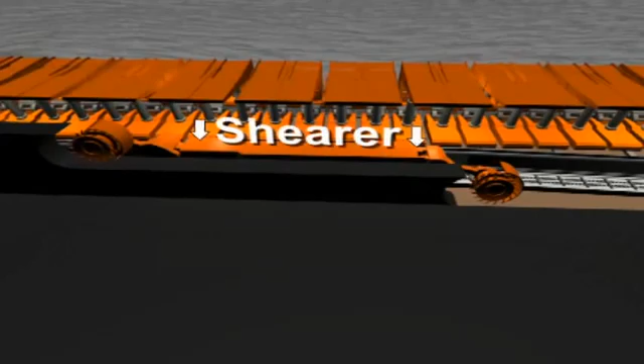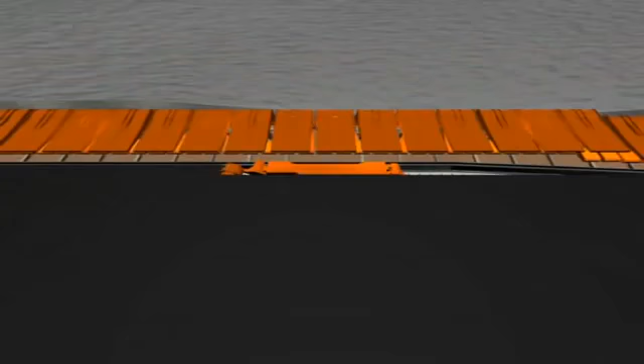The crew began producing coal and made their first call out at 7:30 a.m. The crew was responsible to call out their total shift production every 30 minutes. They also called out downtime and the location of the shearer. They reported the longwall was running and had mined .2 passes with no downtime. The shearer was at number 70 shield mining toward the tailgate.

At 8 a.m., they reported .6 passes with no downtime. The shearer was at number 140 shield mining toward the tailgate.

At 8:30 a.m., the longwall reported .8 passes with no downtime, and that the shearer was on the tail in the shuffle process. The shuffle is the term used at this mine for the process of cutting back into the coal face on each end of the longwall.

At 9 a.m., the longwall reported 1 pass with no downtime, and that the shearer was at the number 155 shield mining toward the headgate.

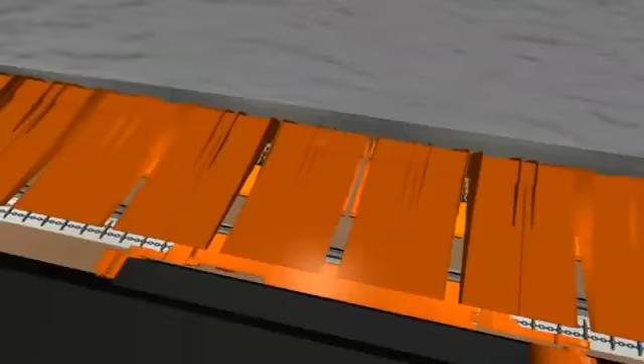At 9:30 a.m., the longwall reported 1.4 passes with no downtime, and that the shearer was at number 65 shield mining toward the headgate.

At 10 a.m., the longwall reported 1.8 passes with no downtime, and that the shearer was on the headgate.

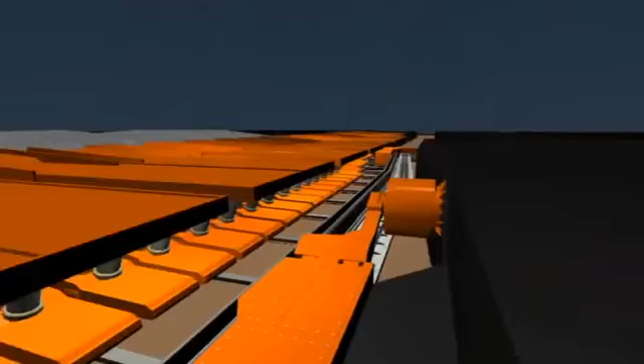At 10:30 a.m., the longwall reported 2 passes with no downtime, and that the shearer was on the headgate getting ready to replace bits.

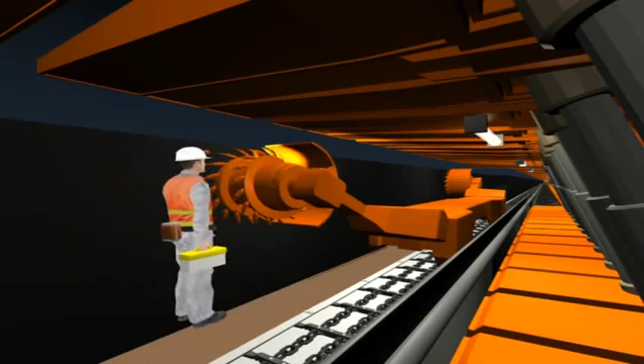MSHA believes that after cutting the shuffle, the crew parked the shearer to replace bits. While setting bits, the longwall crew discovered a B-lock, a part of a pin that connects the ranging arm to the shearer, was missing.

At 11 a.m., the longwall reported that 25 bits were set in the shearer and that the shearer was down due to a lost B-lock on the tail ranging arm. The crew estimated that they would be down until approximately noon.

At 1:30 p.m., they reported that the B-lock was in and they were tightening the bolts. They estimated they would be running at 1:45 p.m.

Between 1:30 and 2 p.m., the longwall started running. The 2 p.m. report shows 2.2 passes of production for the shift, indicating they had loaded .2 passes between 1:30 and 2 p.m. The report also showed 10 minutes of downtime in this period checking the B lock. The shearer was at number 65 shield, mining toward the tailgate.

The 2:30 p.m. report showed 2.4 passes, 2 minutes downtime checking the B lock, and that the shearer was at number 115 shield, mining toward the tailgate.

The pre-shift examination record shows that the longwall foreman called out the results of his pre-shift exam at 2:40 p.m. to the oncoming longwall foreman. This is the last known communication from the longwall to the surface.

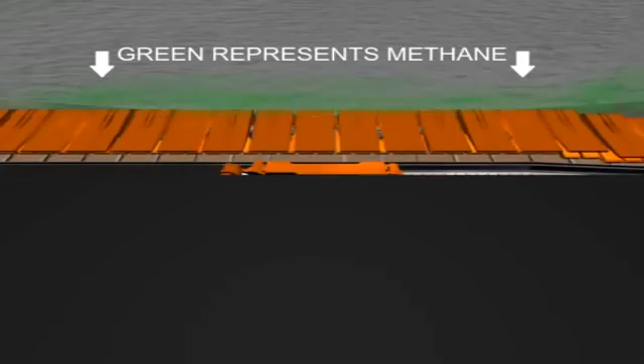During the investigation of the longwall, methane was found to be emanating from the mine floor near the back of several shields near the tailgate end of the longwall face. Investigators believe the methane migrated from behind the longwall shields.

The methane encountered an ignition source, likely hot streaks, left by 2 dull, worn shearer bits cutting sandstone. Additionally, the water spray system was effectively absent because 7 water sprays were missing from the tailgate drum of the shearer.

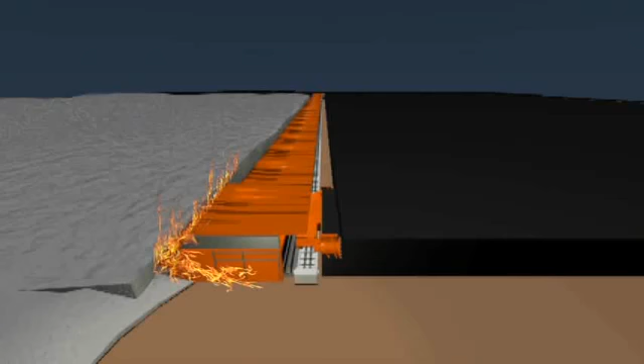MSHA believes that as the shearer cut into the tailgate entry, a methane ignition occurred and was seen by the shearer operators, who shut off the shearer. The electronically recorded event log on the shearer indicated that the tail shearer operator shut off the shearer with his remote control just before 3 p.m. The flame from this ignition continued burning behind the shields.

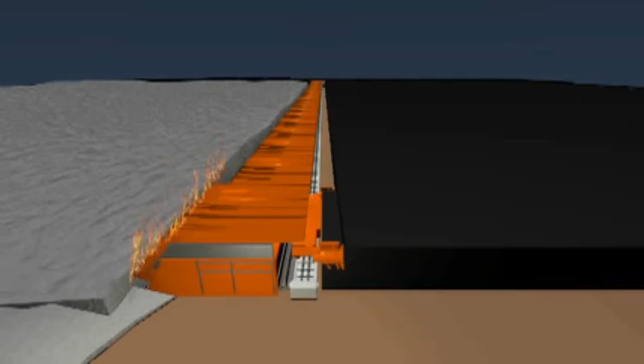Upon realizing that the ignition could not be controlled, the shearer operators, shield man, and longwall utility man evacuated toward the headgate. Investigators believe that these individuals shut off the face conveyor at the control box near the head end of the face, called the headgate operator, and instructed him to de-energize the shearer. The headgate operator opened the visible disconnect for the shearer cable and also shut off the water to the shearer.

During this time, flame from the methane ignition continued burning in the gob behind the shields, and those miners continued their evacuation. At about 3:02 p.m., the flames encountered an explosive mixture of methane in the tailgate entry, causing an explosion. This methane explosion involved about 3,000 cubic feet of methane air mixture. The flame from this methane explosion created enough heat and energy to suspend and ignite coal dust from the mine roof, ribs, and floor, resulting in a massive coal dust explosion.

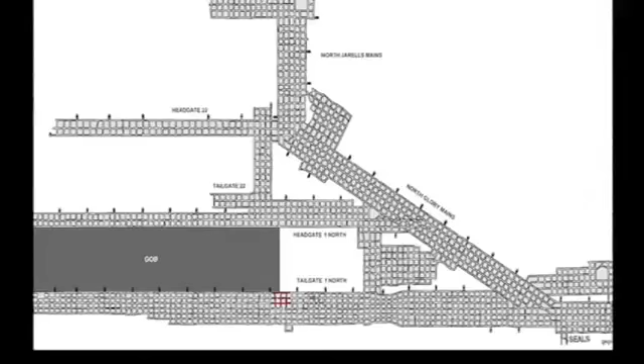Flame from the methane explosion would have traveled about 140 feet before all the available explosive methane was consumed. The methane explosion propagated away from the longwall face. With a flame speed of approximately 300 feet per second, the methane explosion would have extinguished in about half a second while generating a maximum pressure of about 4 pounds per square inch of pressure.

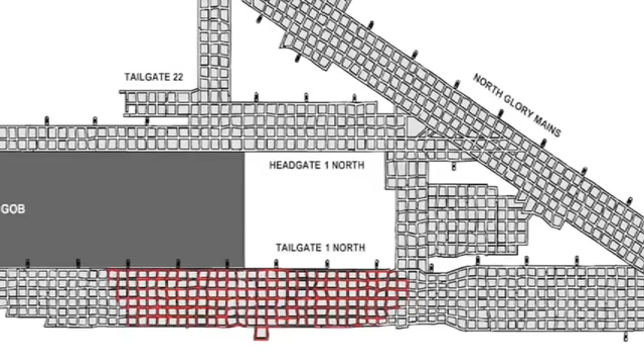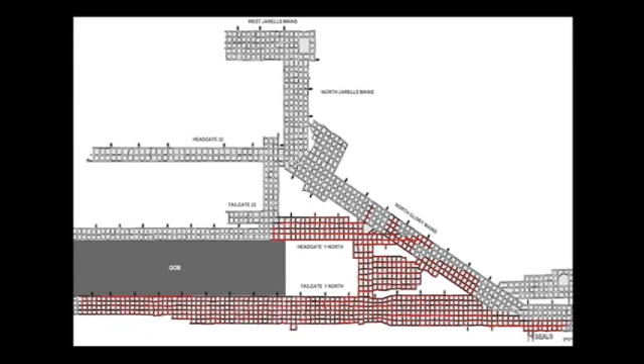However, significant quantities of coal dust were suspended and ignited during the methane explosion. The ignition of coal dust allowed the explosion to eventually propagate throughout all the underground areas affected by the explosion flame. Explosion forces were generated by the flame in all directions, including back across the longwall face. Evidence indicates that approximately 14 pounds per square inch of pressure traveled back to the longwall headgate from the coal dust explosion.

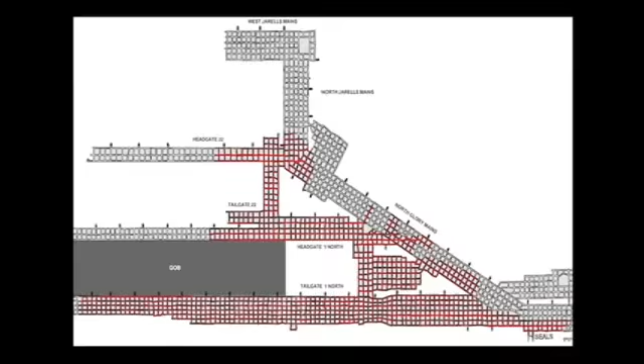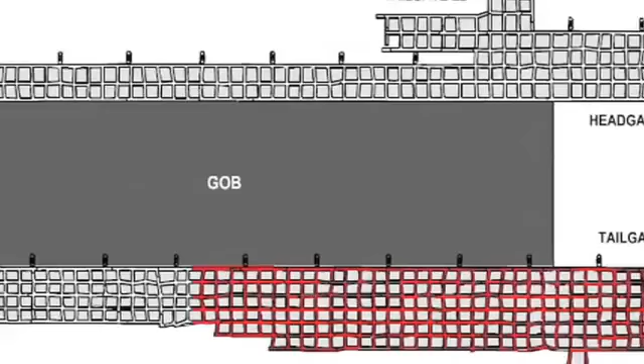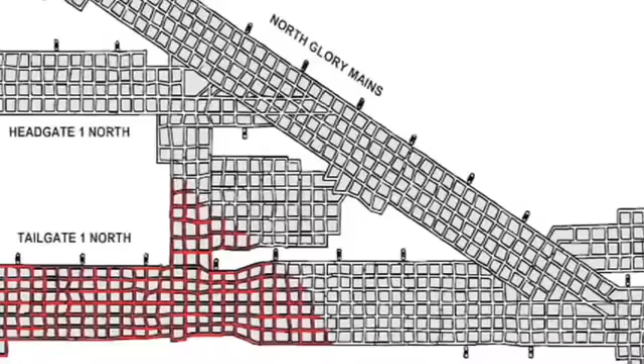Several hundred feet before reaching the crossover entries, additional coal dust became involved in the flame, and speeds accelerated to over 1,000 feet per second in all tailgate entries. The flame speed dropped dramatically in the area where the tailgate entries intersect the North Glory mains and eventually extinguished about 11 crosscuts out by the tailgate entries.

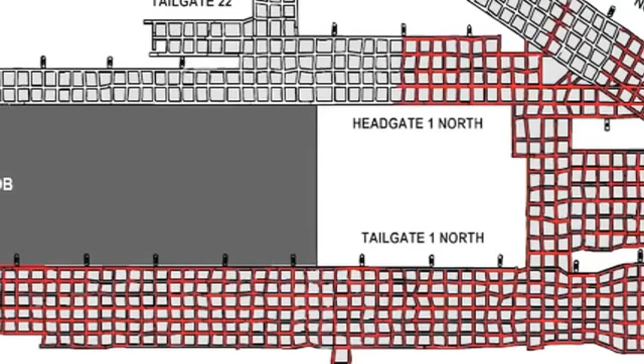In the crossover entries, the flame slowed but continued to travel toward the headgate entries of the active longwall, known as Headgate 1 North. Flame propagation did not occur along the length of the North Glory mains, but small pockets of flame extinguished as they projected a short distance into the entries of the North Glory mains.

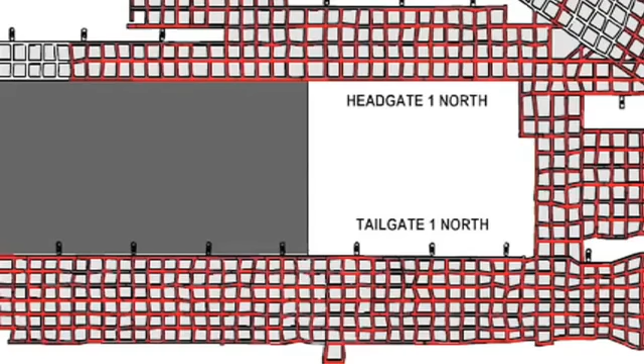As the flame entered Headgate 1 North, the destructive pressures propagated in-by, with a flame speed of about 1,200 feet per second, generating over 20 pounds per square inch of explosion pressure, as indicated by the damage to several monorail sections carrying the longwall cables. Although flame did not enter the longwall face, pressures ranging from 7 to 14 pounds per square inch did enter the longwall face from the headgate.

Flame and forces did continue in-by in the Headgate 1 North entries and into the Tailgate 22 entries. As the coal dust explosion propagated into Tailgate 22, explosion pressures increased to near 20 pounds per square inch due to pressure piling at the faces.

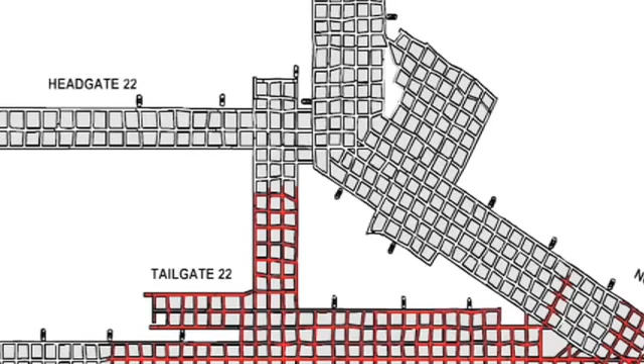The explosion flame turned into the crossover entries and headed toward Headgate 22. The flame propagated into Headgate 22 at speeds approaching 1,500 feet per second, generating a pressure of approximately 25 pounds per square inch. Additional coal dust caused increases in the flame speed and pressure as the flame propagated in-by Headgate 22. Calculations have shown that explosion pressures were on the order of 52 to 65 pounds per square inch.

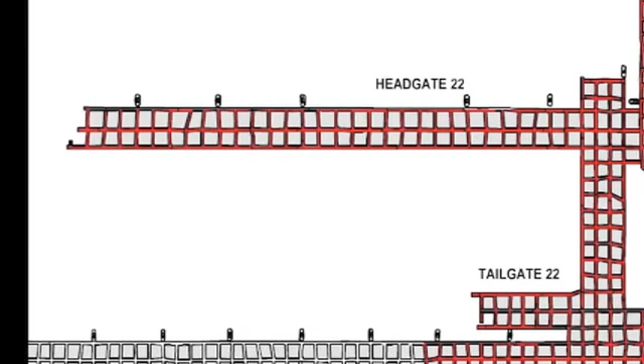Pressure piling occurred as the flame tried to continue in-by against the faces. This resulted in a reflected overpressure traveling out-by that could have reached a maximum of 105 pounds per square inch.

As the flame traveled into Headgate 22, it also propagated into all entries and crosscuts of Gerald's Mains and West Gerald's Mains. Pressures throughout these two areas averaged about 20 pounds per square inch due to flame speeds of over 1,000 feet per second. The flame of the explosion extinguished at the dead end in West Gerald's Mains due to a lack of sufficient oxygen for continued propagation.